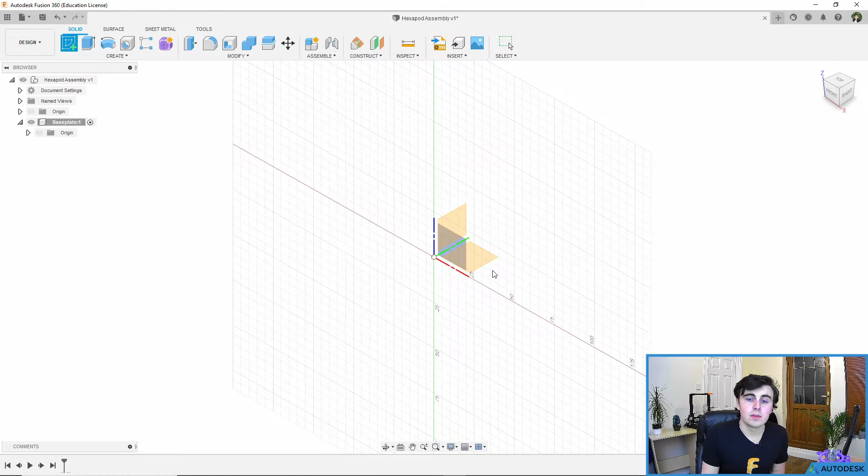So create a sketch. And the first thing it asks you with a sketch is what plane you want to put your sketch on. Now because a sketch is 2D, you can't have it on all three planes at once. And in our case, we want it in the XY plane, or the flat plane, so that it's horizontal. So you can click on this plane, and you see that the grid appears and is now prominent in that plane. I'm going to go to the view cube, click on the top. This way I'm looking straight down at my sketch, and you can see it really clearly.

Now that we've created a sketch, you'll see that the sketch menu has come up. A new area has appeared within our design at the top, and you see all of these sketching tools that have appeared. Much like all of our other parts, we have left to right. So it's create on the left hand side, where we can create 2D shapes such as rectangles, circles, slots, even text. After that, we can modify our sketch with the various tools there, and then we can constrain it, inspect it, and so on.

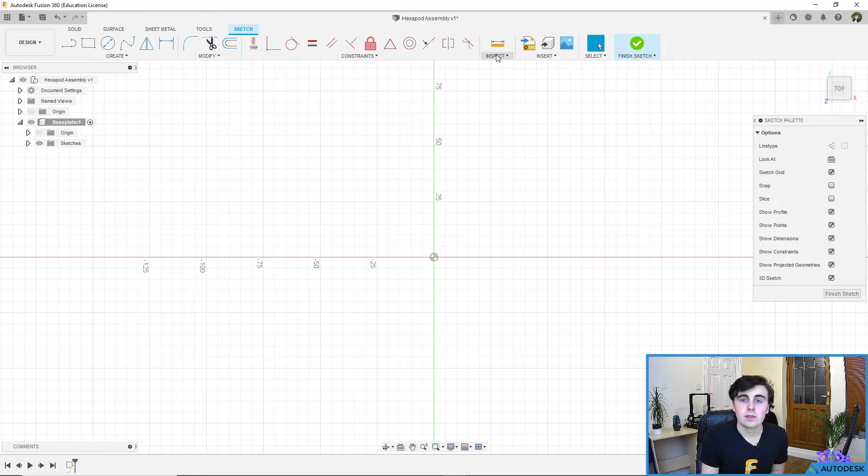Now we want to create a hexagon. In Fusion 360, this comes under the polygon section. We're going to use the first polygon, and this allows us to do any sort of polygon and define the number of sides that it has. You'll see that now I've selected polygon.

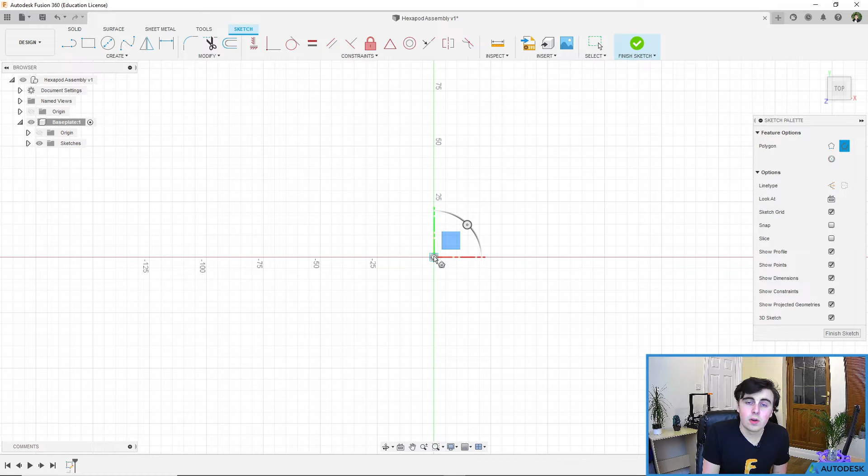Just below my cursor on the right hand side is a little polygon shape, and a little crosshairs has appeared on my mouse. I can now click, and this will be the center of our polygon that we can drag out. Because we want our center to be in the center of the main file, that's where the origin currently is, I'm going to click in this center point, and you'll see that when I lock on to the center point, a square appears. It's a little bit unclear here, but in other places you'll see it, a square appears, and that shows that you've locked onto a point. I'm going to click, and then I can move my mouse out to the side and rotate it, and you can see that we're drawing this polygon.

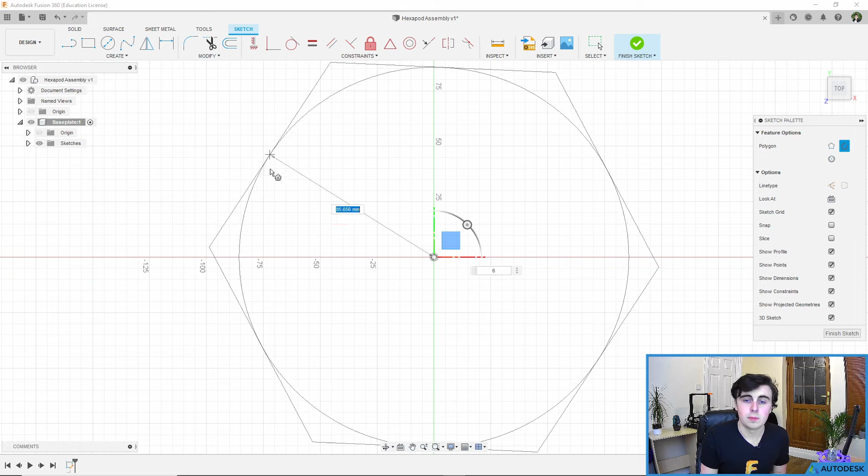Now whenever you're drawing something, it'll typically give you the options that you need, the main ones. In this case, we have the distance that we want from the center, and also we have the letter or the number 6 in another box. Now the distance refers to the edge point to the middle, and the 6 refers to the number of edges that we have. In this case, I'm going to leave the dimension for now.

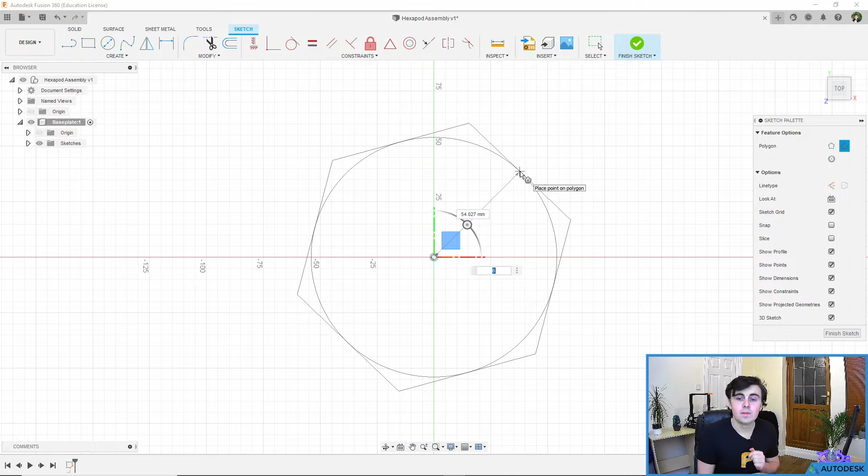I'm going to redimension it in a second after we've created our shape. But I do want to make sure I show you how many sides you can have. One of the key tools you can use is when you're drawing something, you can press the tab key to switch between the different boxes. So you see here, I can press tab and switch back.

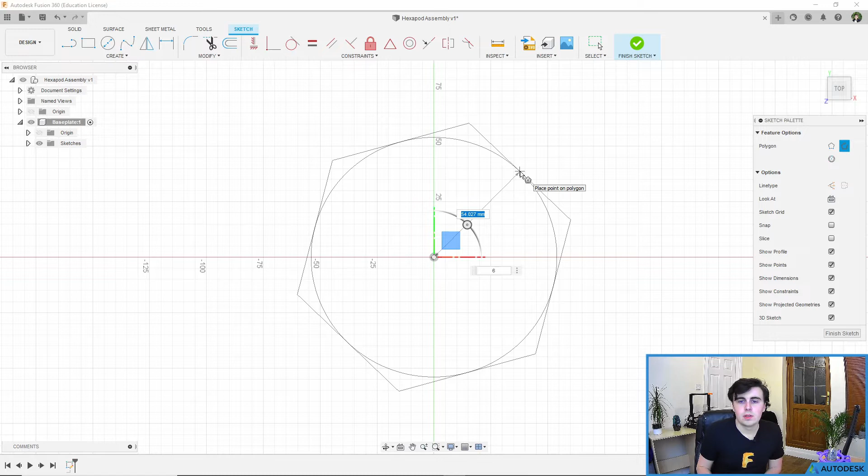Now I'm going to make, we want 6, but for example, I could make it 12 and you'd see a 12-sided shape, or 5, for example, and you'd see a 5-sided shape. We want it to be 6, and you'll also see that once you've put in a number manually and then press tab, you can go back and change it. In this case, we want 6 sides, but I'm not going to write in the dimension right now. I'm going to dimension it straight after this, so I can show you the dimension too.

So just click anywhere, and you'll see we have this outline. Because we've created it as a specific shape, it's an enclosed area, and you can slightly see a blue tinge to the inside area here. So it's slightly shaded with the blue on the inside, it's clear on the outside. That shows that you have an enclosed area.

Now that I've done this, you'll see my mouse is still on the polygon tool. I don't want that anymore, so I'm going to press escape, and it will return to my normal selection cursor.

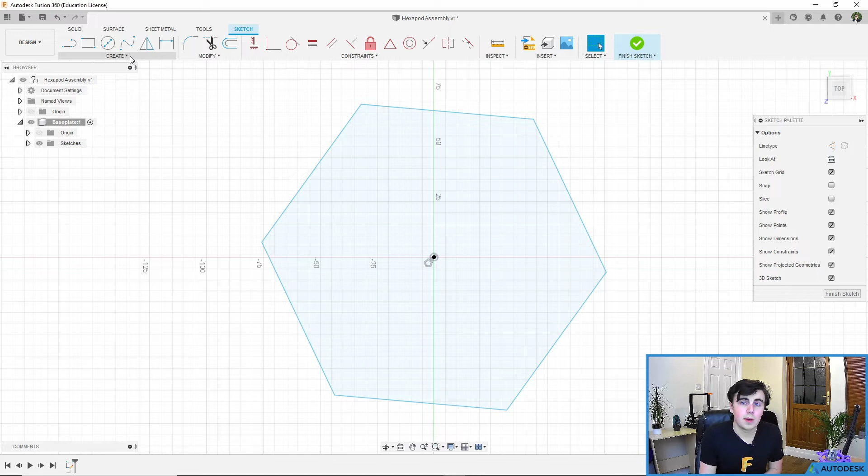So I have this shape, but as I said, we want to dimension this, and I wanted to use the dimension tool so I could show you how it works. So if you want to set a certain size for a part, you can go to Create and Sketch Dimension. You can also press D on your keyboard and it'll automatically select that. You'll see the little dimension icon comes up, and I can select 2 lines and it'll draw a dimension between them.

Now we want the distance between each line, the overall width, to be 160 millimeters. Mine's automatically in millimeters, so you don't need to type in the unit, but you can type in units if you want to. Once you've typed it in, press enter, and you'll see that your hexagon will size up or down depending on where you clicked, and you'll see this dimension that is now on.

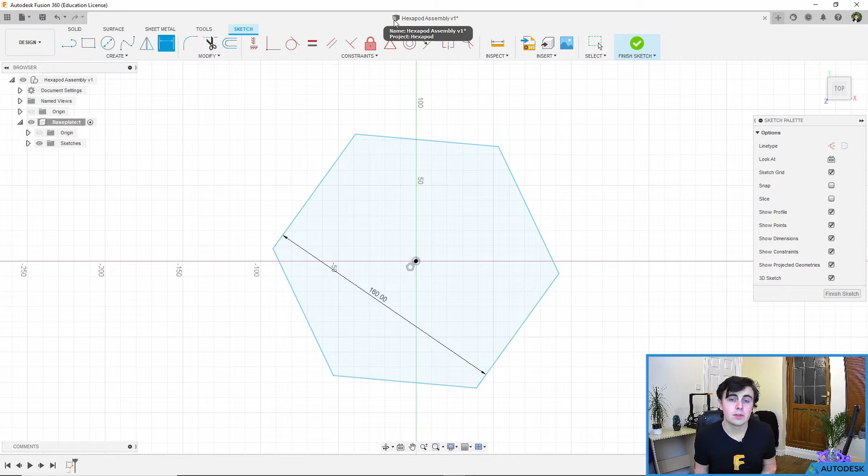A really important feature of Fusion that I want to tell you about now is constraints. With a sketch, ultimately every sketch that you make, you want to be fully constrained. Now what this means is that it cannot move in any way because you have fixed it in all the different orientations and movements that it could have.

In this case, if I click escape and go back to my normal cursor, I've now fixed the distance between these 2 edges, and because this has a constraint of being a certain shape, all of those edges are now that fixed distance apart. But you'll see if I click on it and move it, you'll see that I can actually rotate my polygon. This means that it is not fully constrained because I can move it.

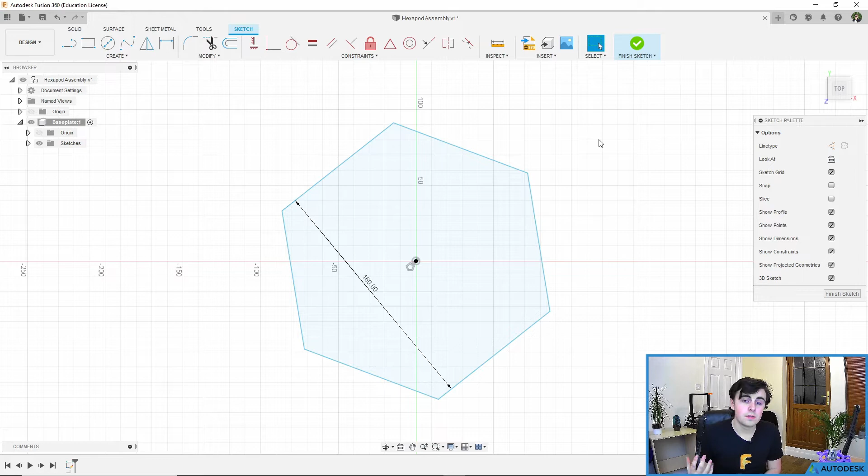So what we want to do is add another constraint to fix it in place. One of the easy ways you can tell whether a sketch is fully constrained or not is the colour of the outline. So currently you can see that it is blue. As soon as it is fully constrained, you'll see that it turns to a solid black line.

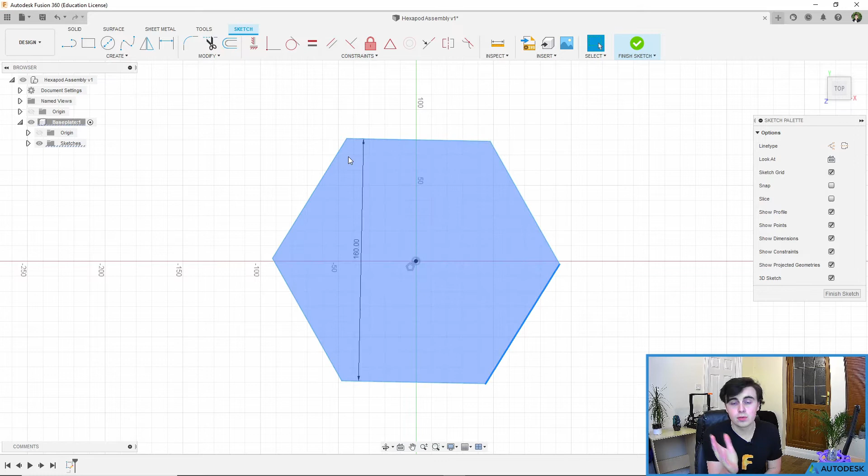If you're struggling to figure out how something is constrained, the easiest way to see how you need to constrain it is just to click on a line and try and drag it and see how it moves. In this case, it's rotating, so I can see that the center point is fixed and the actual shape is fixed, they're all constrained by it. It's actually the rotation, and one of these lines, I need to constrain to be fixed in place, and then the whole thing won't be able to rotate either.

Don't forget, if you move something, you can always undo it. So best bet is to drag it, try and move it, see what moves, and then base your constraint off that.

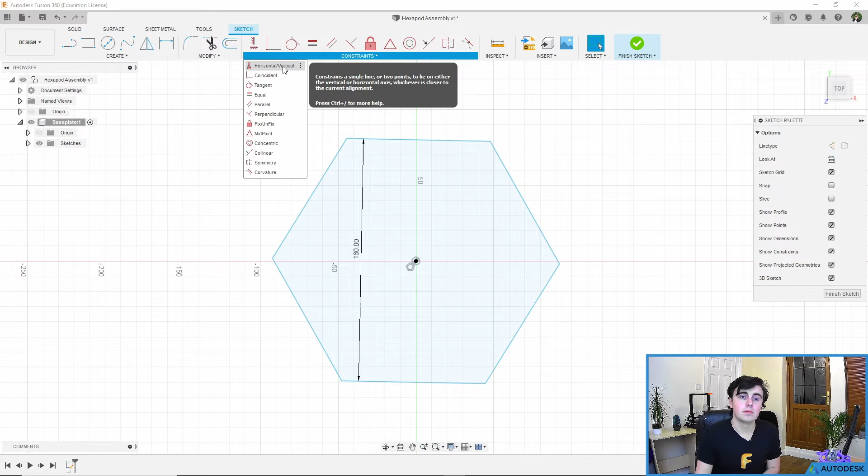In this case, as I said, we want to stop these rotating, and one of the first constraints that we have is the horizontal vertical constraint. What this does is it takes a line and it fixes it at being either horizontal or vertical. If you click on your constraint, you'll see it gets highlighted, and then you can select the line that you want. In this case, I'm going to select this one, and you'll see that it rotates so that it is

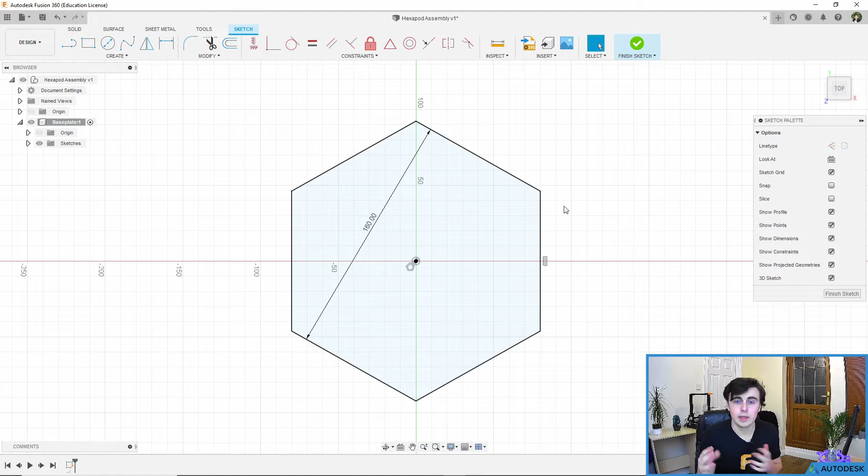vertical. As I said, our line has now become black, which means that if I press escape and try and drag my shape, it's not going to move anywhere because it is fully constrained. You might have also noticed this little icon on the side. Every constraint has a little icon that you can see. In this case, that's the horizontal vertical constraint. The best way to tell what constraints they are is by looking at the little icons up here.

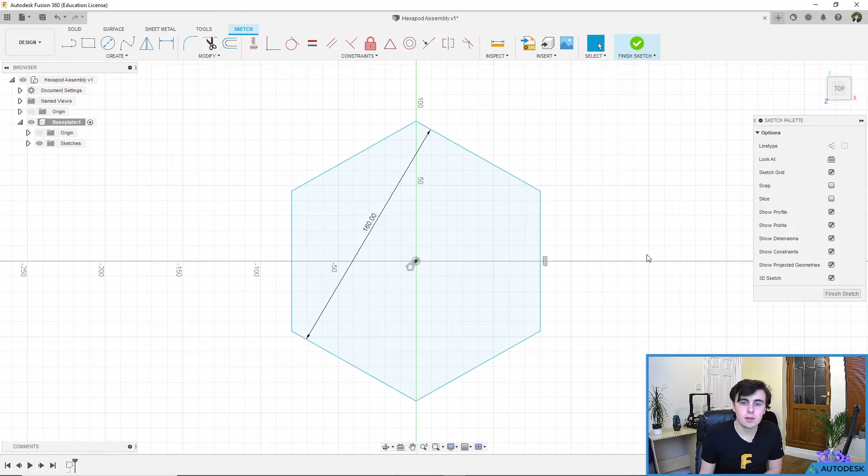We also have in the middle here this constraint, which is constraining the shape that we have. And if I just hover over the center there, you can see there's actually another constraint here. You can see it's a coincident constraint. What you can do with the constraints is you can actually click on them and you can delete them. So if I click on it, you see it's highlighted blue, I can press delete, and that constraint has now disappeared. You can see my shape now goes back to blue.

And if I click on it, I can actually drag it, and you can see where that constraint was working. It was stopping it from moving linearly. I can just press Ctrl Z, undo, constraint is back. Now the reason you might want to delete a constraint is because, as you can see here, Fusion 360 automatically assigns constraints as you sketch.

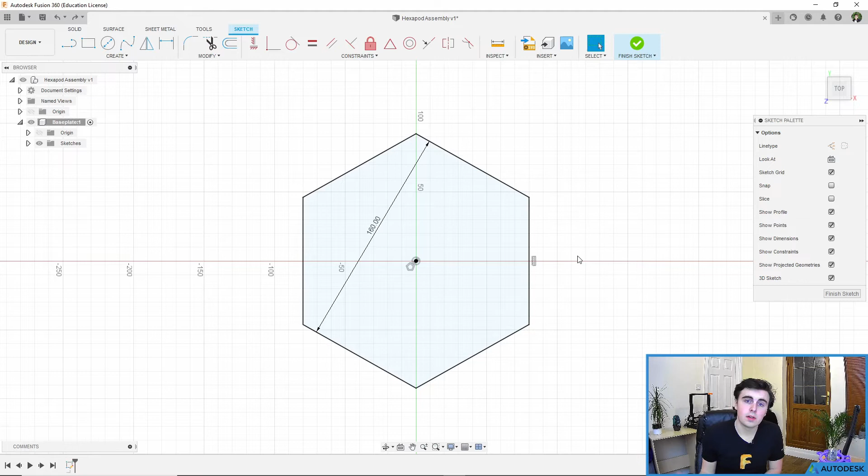So in that instance, because I started my polygon from the very center of the part and we had that locked on square, it assigned a constraint because when I would click there, it assumed that I wanted it to be fixed there. So there are times when you might create a constraint accidentally while sketching, and in that case you can go in, click on it, and press delete. Hopefully though, it should be more helpful than it is.

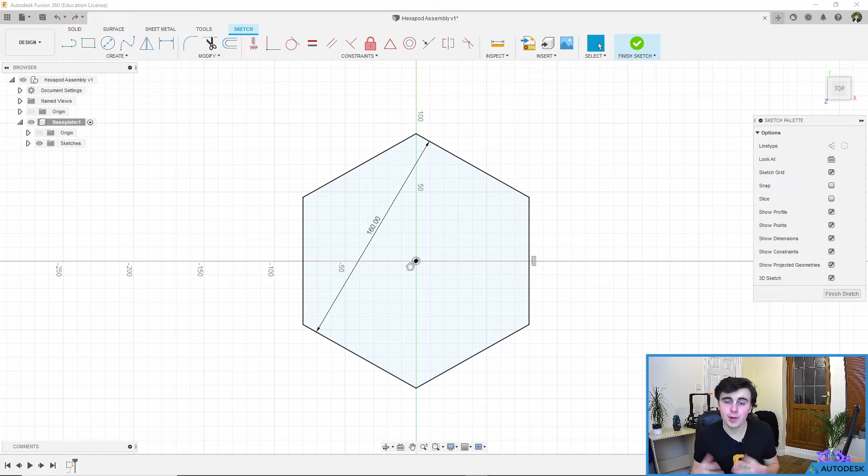We have our main hexagon now, and what we want to do is to create our base plate. We need to add some features to it so that we can attach our arms. To do this, we're going to start by adding more to our sketch. We're still in our sketch environment. I'm going to click on line to create a new line. You can also find this here or by pressing L.

I'm going to draw a line out from the side here, and you'll see that when I get close to another sketch line, my crosshairs lock on and become blue. This is very useful if you want it to lock onto a line, and it allows you to make sure that your areas are enclosed if you're creating an area. You'll also see, as we said before, that different constraints can be automatically applied.

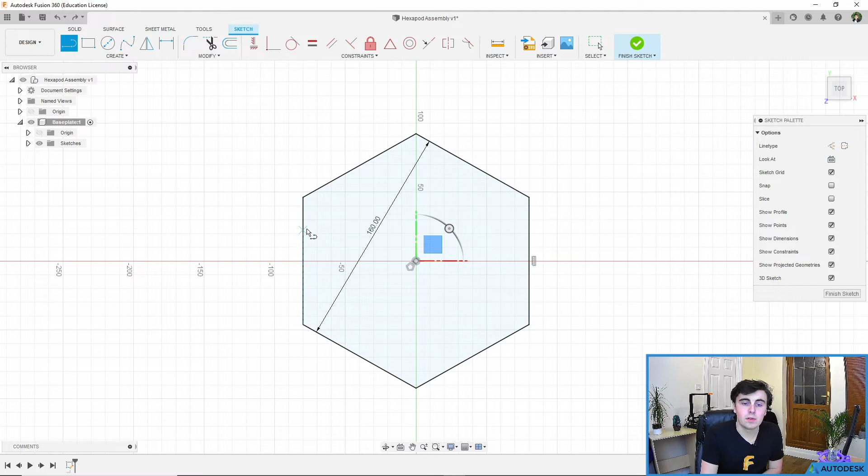In this case, I want to draw a line from the center of this line here, the center between these 2 points and on this red line. You'll see that when I hover over that, it locks on and it creates a blue triangle. Now this is mimicking the midpoint constraint, which you can see up at the top. And what that means is that it is constrained in the midpoint of this line here. So we want that, so I'm going to click to create our line. And I'm going to draw it out to the left here.

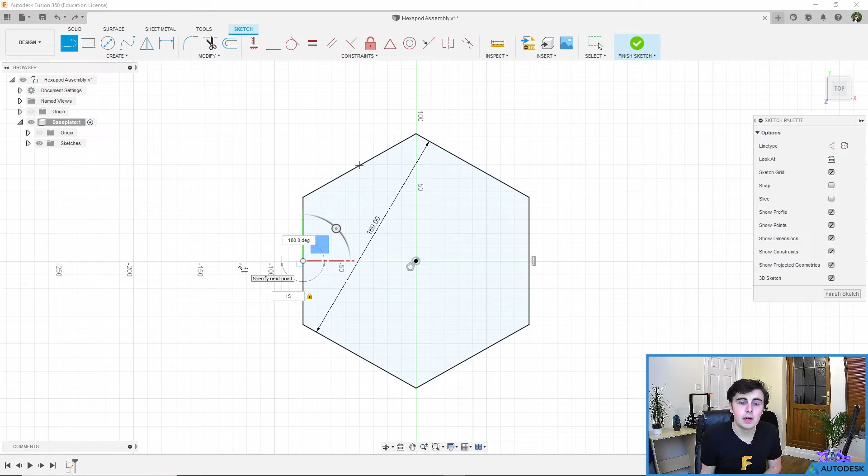Now in fact, I could draw dimensions separately like I did last time. In this case, I'm just going to draw it in, and we want it to be 15 millimeters long. You'll see that now I've written that in, a little lock icon has come up next to my part. And that means that because I've manually typed it in, I can change the angle if I want, but even if I adjust it with the mouse, it's locked in to 15 millimeters long.

I can press Tab again and switch between them if I wanted to. If I wanted to lock the 180, I could type it back in and then press Tab again, and you see the lock appears. But it should lock on automatically to your red line. Now that we've made this, I want to click, and that will confirm that sketch line. But you'll see that actually another line has appeared.

So in Fusion 360, when you're drawing a sketch line, if you want to continue with your sketch, you can click and it will create a point there. So our previous line is still there, and it will start a new sketch line from that point. In this case, I don't want any more sketch lines. I'm happy with the one I have, so I can move my mouse around and click on the little green tick, which will be somewhere in the area. That will finish my sketch without drawing a new line.

Alternatively, before I had clicked on the previous one, if I'm drawing a line, say I wanted it there, if I've let go of my mouse and I have it where I am, which is much easier often when it's locked on, I can actually press enter and it'll automatically just end the sketch where it is with that line. So if I press enter, it will create that line. Now, I don't want this line, so I'm just going to press delete. But those are the two options. You either click and continue, or you can press enter to completely stop.

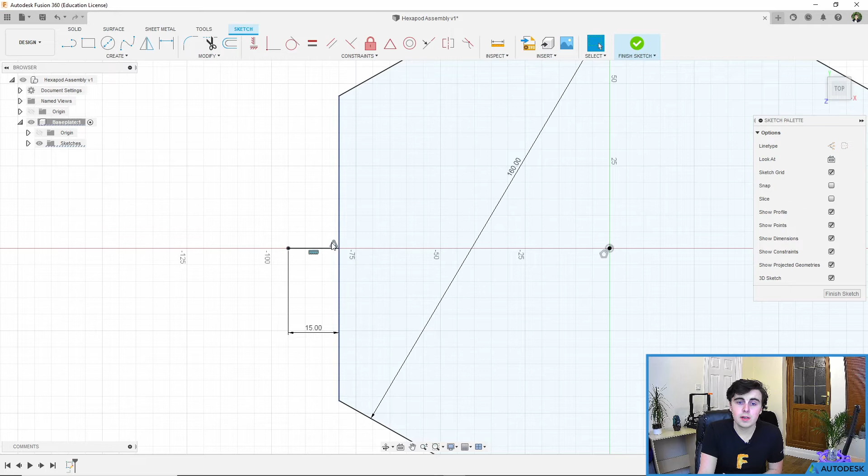We now have our 15 millimeter line, and you'll see we have a horizontal vertical constraint here and a midpoint constraint, you can see. Now we're using this endpoint as a reference for a circle to create our section that juts out for our fixing. But what that means is that this line here isn't actually serving any purpose. We don't want it to be physically there. So what we can do is we can click on the line and we can go over to our sketch palette on the right hand side.

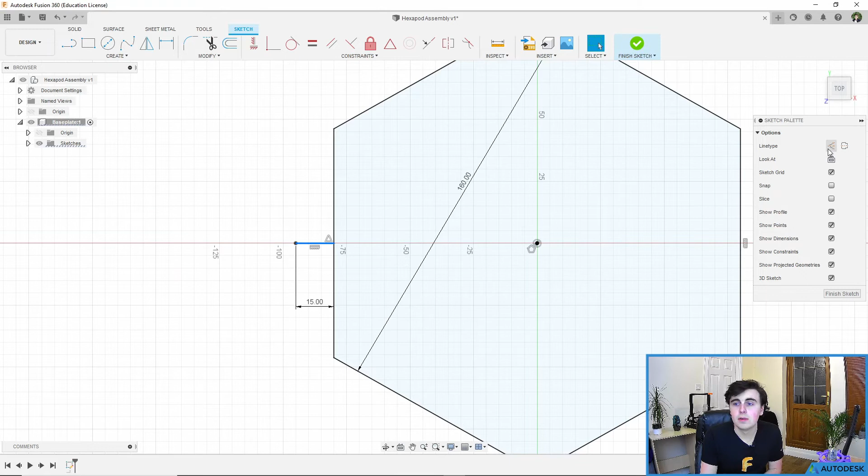Now the sketch palette allows you to change different things about what you're viewing in your sketches. For example, I could turn off constraints and you'll see the constraints disappear. Same goes for dimensions, profiles, all sorts. But at the top here you have a line type option, and what this means is that you can select a line and make it a construction line. You'll see that it changes to be a dotted, slightly greyed out line, and this means that it is not a physical line that's going to be there. It's not going to affect much. All it is is a reference line. And in this case, that's exactly what we want.

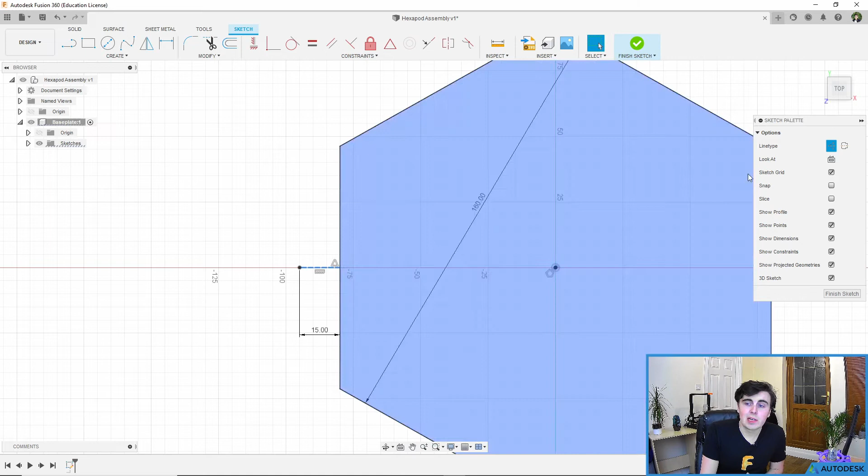If you want to change it back, you can always click on a line and unselect it, or you can turn it on to begin with, and then any line you create will be a construction line. Just watch out for this though, because I've created my line and I've ended that line, but it's still turned on. So sometimes you want to create a construction line, but it might still be turned on after you've created it when you don't want it. So just keep an eye out for that. I'm going to delete these.

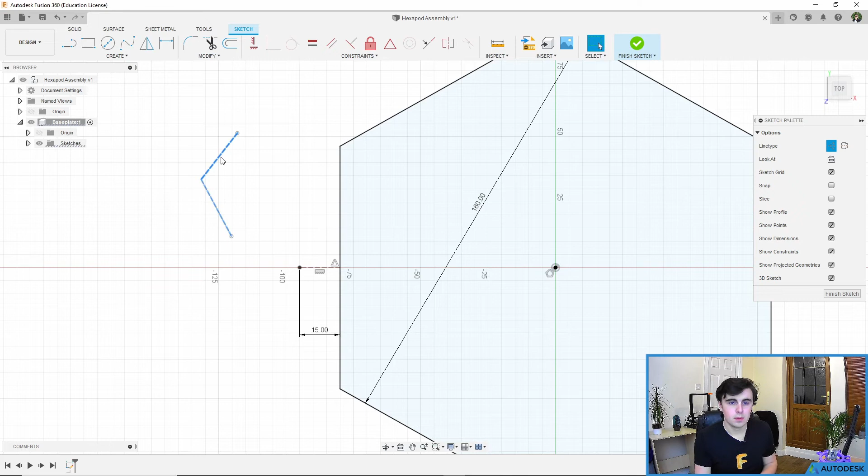Now that I have my construction line, I'm going to use this endpoint as a reference. So we're going to create a circle. Another thing you can use the sketch palette for is you'll see that feature options appears whenever you're creating a new sketch. Here we can draw different types of circles. So you could choose, say, a 2-point circle, which allows you to define 2 points on the edge of a circle. But in this case, we actually want a center diameter circle because our reference point is the center of the circle.

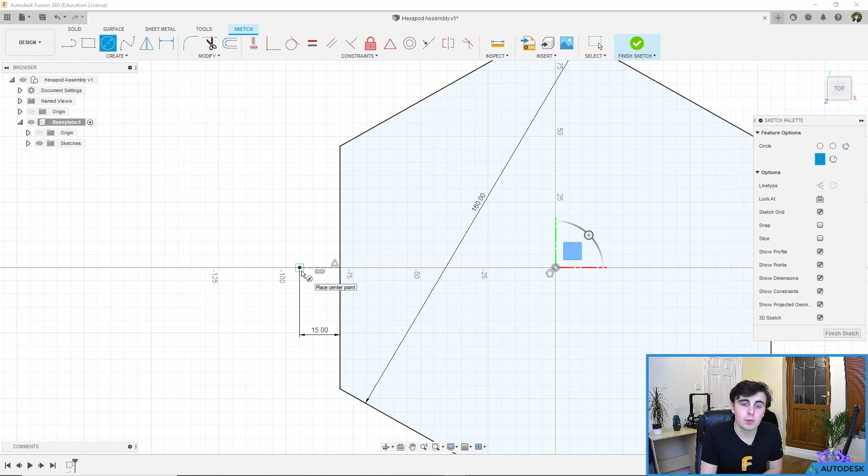Now I have this. You can see I've got construction still turned on, so I want to turn that off. Now I want to click on this point, and you'll see that box pop up again, which means that it's locked to that point. Once I click, I can drag my circle out, and we want this circle to be 25 millimeters in diameter. So I can type in 25 and press enter to create my circle. Again, you can see a new area has been created because it's separate, and we can click on these areas if you wanted to.

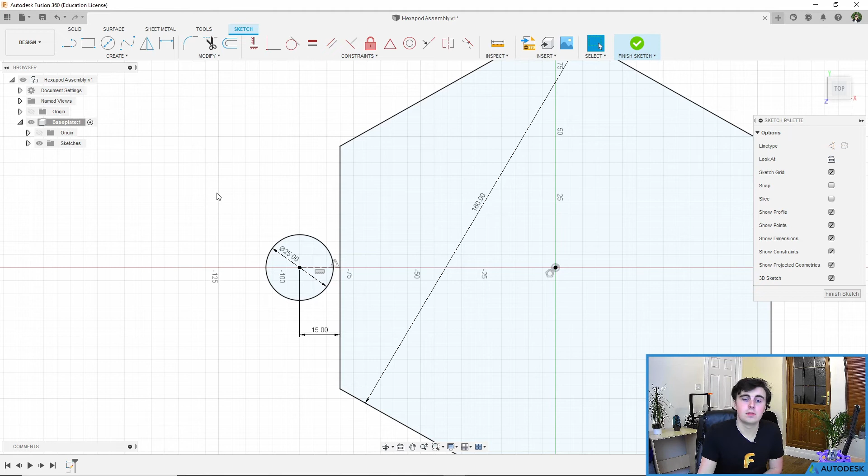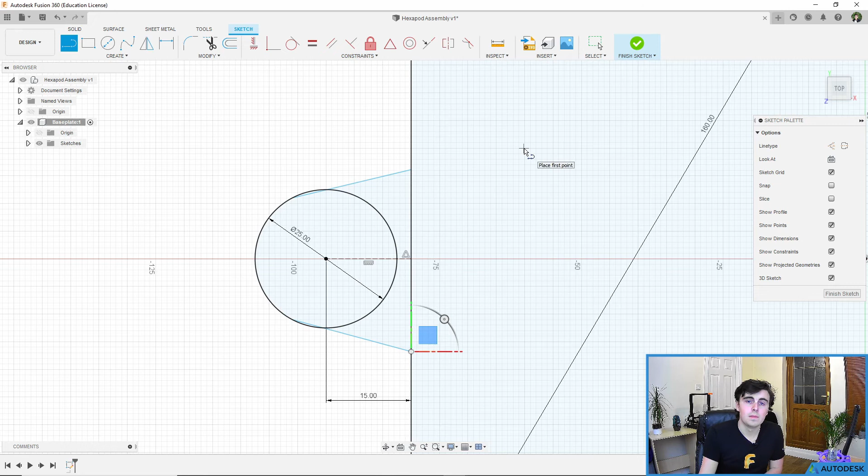Now that we have our circle, I want to create 2 lines going straight down to a part to join it. So I'm going to click on the line tool again. I'm going to click on my circle and on the edge. But you'll see A, these are blue, B, these are cutting through my circle, and they're not quite perpendicular. We want these to be completely perpendicular to our vertical line. So we're going to apply some other constraints here.

First of all, we're going to apply the perpendicular constraint. And what this will do is it will make our lines perpendicular to the 2 we select. So I've selected these 2 lines and they're now perpendicular. You can see the little perpendicular icon come up. I'm going to do the same here. It'll turn to be perpendicular. But now our lines aren't on the edge of the circle when we want them to be.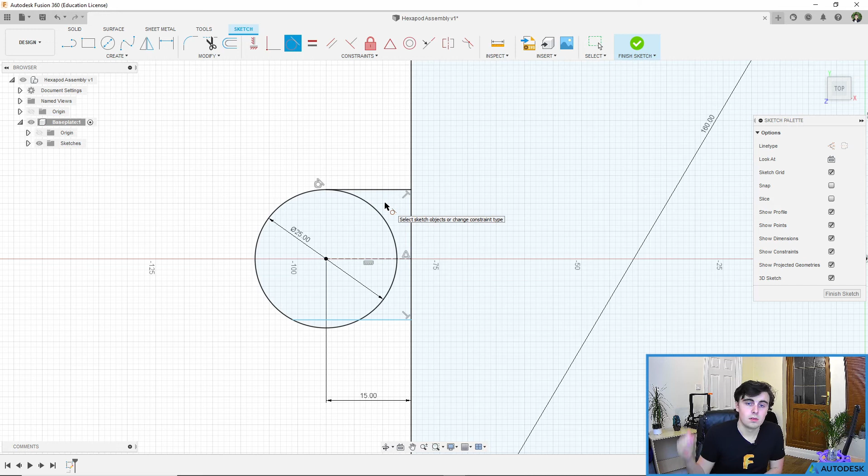So what we want to do is apply a tangent. You can find the tangent constraint here, and it'll allow you to select your 2 lines, or your line and your circle, and it will move your line to be tangential to the circle. You can see the 2 constraints appear with the little icons. Now we have our lines where we want.

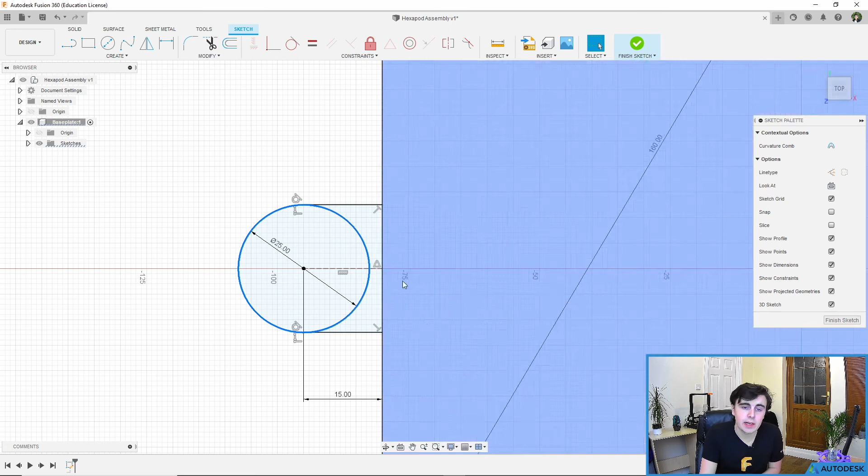Now we want this area in the middle here. I'm just going to press escape. You can see we want these areas here to extrude. What that means, we have actually 3 areas in this case, but we don't need these 2 side circles. Now I can select this line, but you'll see that it selects the entire circle. And I don't want to delete the entire circle.

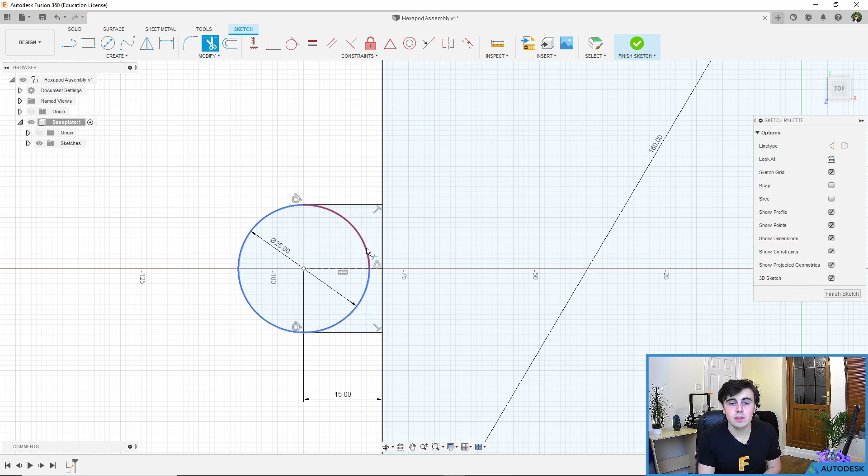But what we can do is we can go to the modify area and select trim. It's also T on your keyboard. If you select trim, what this will do is it will cut away a line up to the point that it meets any other lines. So here I can hover over this section and you'll see that the red section is where it will cut, and that is where it meets the construction line here and our point up here. So it allows us to cut out these 2 center parts and create 1 area.

Just beware that this line here is actually part of the dimension. A lot of people get confused because they think the line hasn't been deleted. This is just a reference for the dimension to show you where the dimension is going because it's a diameter. So just watch out for that.

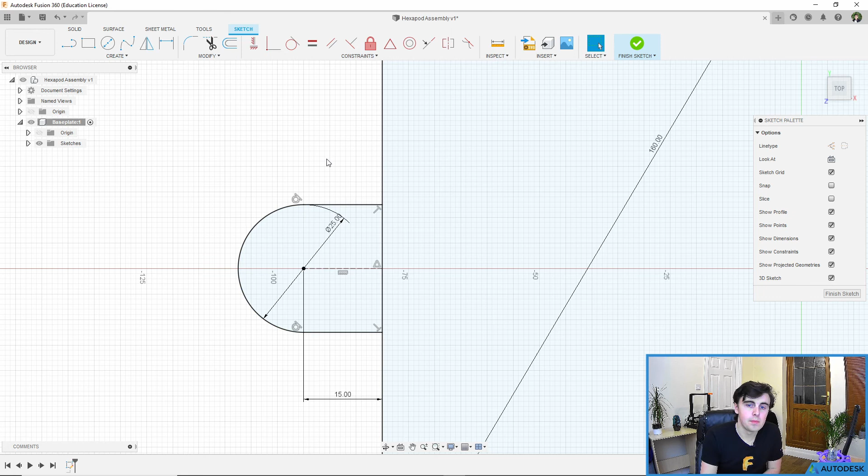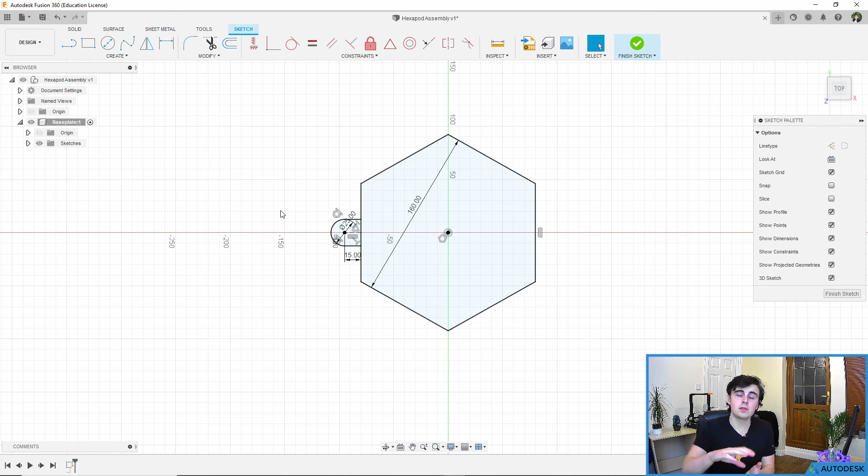I could do the same here, but in this case it's a lot easier to select 6 sections. Because we need 6 sections. We need this to be replicated across our entire hexagon. Now, if you really wanted to, you could sit there for the next 10-15 minutes and draw each one individually, but that just seems like a bit of a waste of time. So what we're going to do instead is we're going to use what's called the pattern tool. Now the pattern tool allows you to take a part and replicate it in a pattern throughout your model.

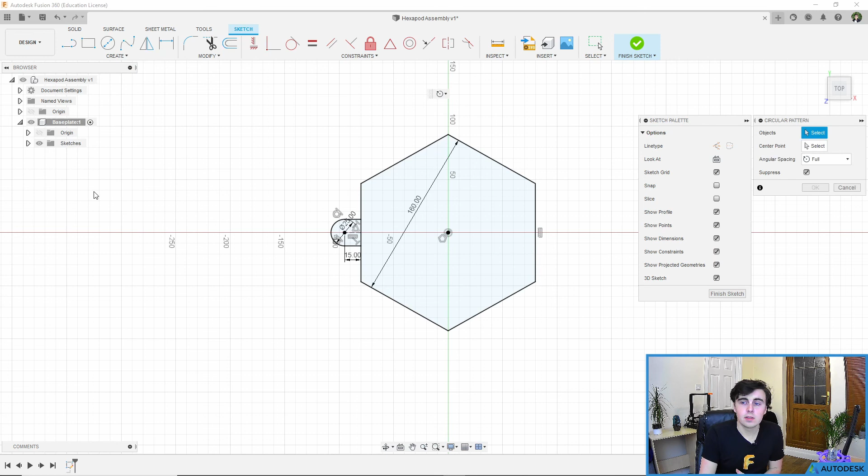You'll find it within the create menu near the bottom, and in this case we want a circular pattern because we want our pattern to rotate around a central axis. But you can also do a rectangular pattern where it goes out into a rectangular shape. So select circular pattern. You'll see on the right that the circular pattern menu box pops up, and we can select our objects that we want to replicate, in this case it's our 2 sidelines and our semicircle.

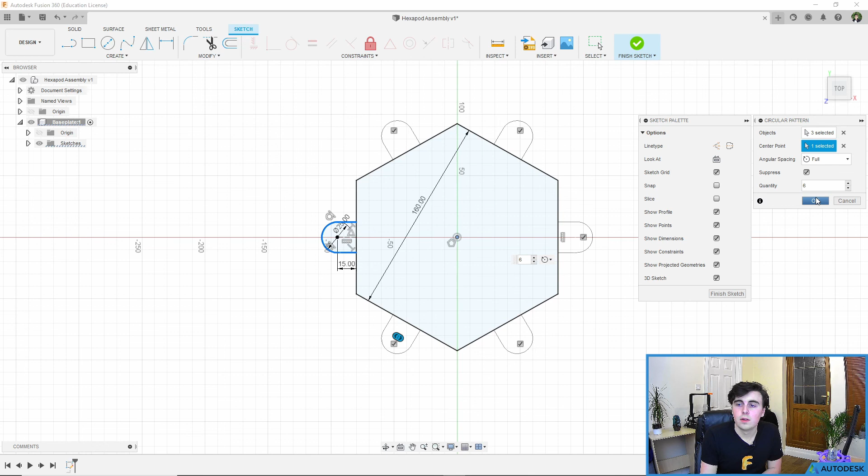We select our center point, which is the center of our polygon, and you'll see that these 2 replications pop up. Now this is because Fusion 360 automatically defaults to having 3 replications. But you'll see here there's a dialog box for quantity. It's also on the side here at the bottom, and you can change this to be 6 so that we have each of our sides with one of these sections. Click OK, and you'll see that these 6 are replicated throughout. You won't see the constraints because these are still based on this, but they all are there.

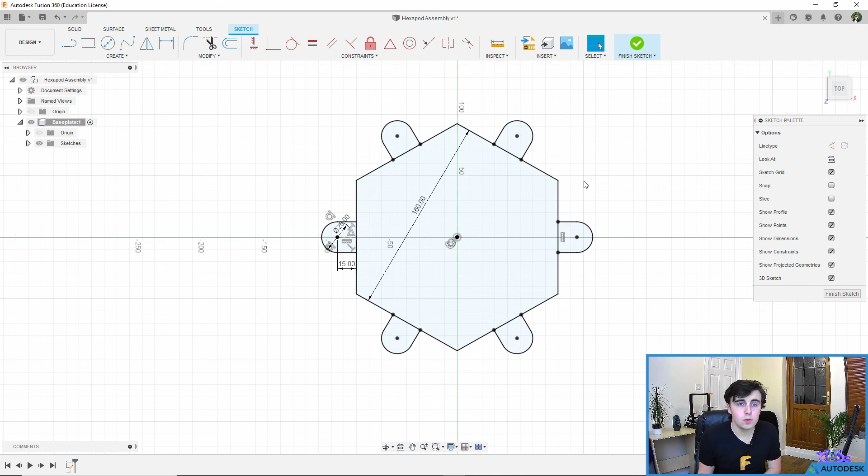What we want to do now is we want to bring our part into the 3D. Now to do that, first of all, we need to get out of the sketch environment. So you can do that by pressing Finish Sketch on the right here, or the big green tick up at the top. You'll see we'll go back into the solid area, and we can rotate around and see, this sketch, whilst lovely, is only in 2D, and we want a 3D part.

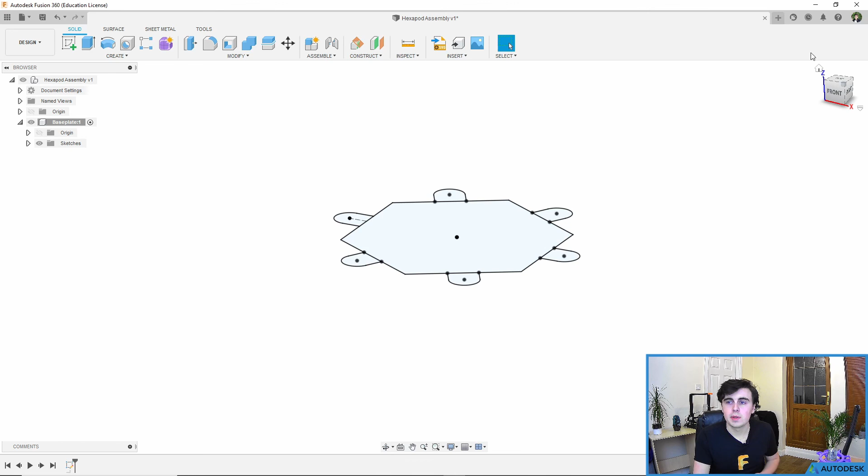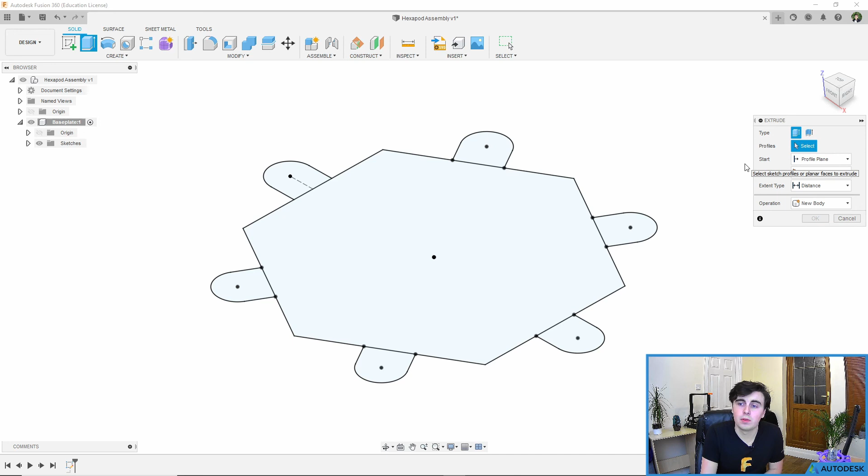So to do that, we can press on the home or orbit around, and we want to use the extrude tool. Now the extrude tool takes an area and pulls it. In this case, we're going to pull it from 2 dimensions into the 3rd dimension. You can find the extrude tool in the create menu or by pressing E, and once you select it, you'll see the extrude box pop up on the right. We want to select our profiles, which in this case is the center, but also all 6 of our areas.

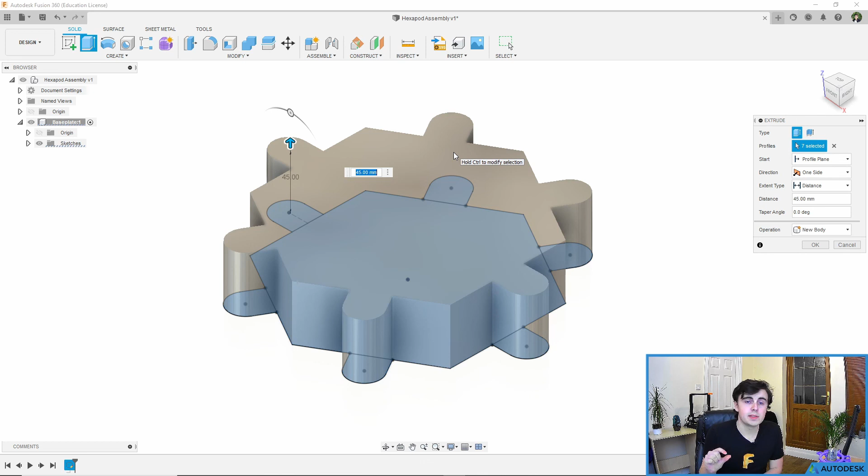Now that we've done this, you can see a blue arrow, and it allows you to drag your part up into the 3D. Now, we want our part to be 5mm thick, and you can see here that I dragged it a bit too far, 45mm. So I can change this, just type in 5, and it will become 5mm thick. Press enter to confirm, and we have our 3D part that you can orbit around.